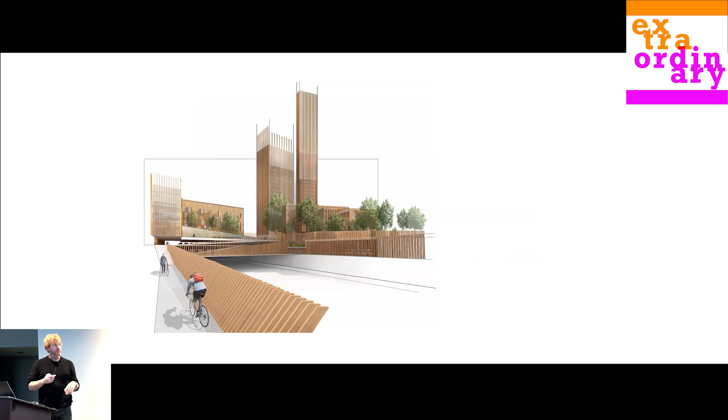And what that means is we have the ability to design totally new buildings in wood that we never thought we could do before. So these drawings are quite old now. About 20 years ago, I was starting to work on how we're going to build skyscrapers, which seemed crazy at the time. How could we build really big buildings? So this was a proposal for Paris in 2010 that was showing a 35-story wood building, which was a bit of an idea and a fantasy to show that it could happen.

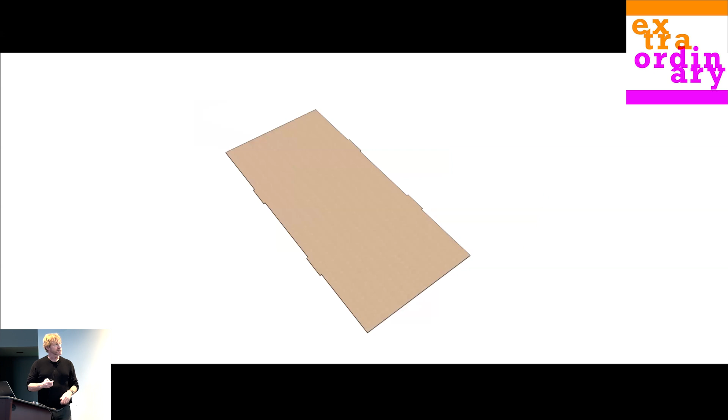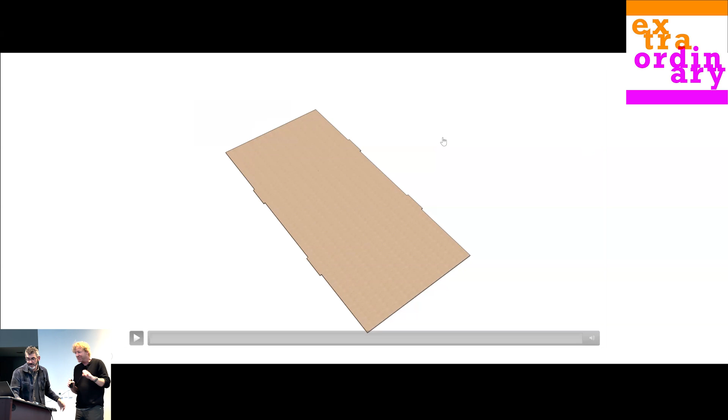But what over time we've been able to do is actually, sorry, I'm going to go back and just let this video go here, if it will. Or not. That's on me. I haven't set up the video properly. Oh yeah. Oh, look at you knowing how to do that. I'm still bad at this stuff. Let's see if this goes. Oh geez, I screwed that up. That was on me. I touched the screen. Get away. Be ubiquitous. All right, don't touch it.

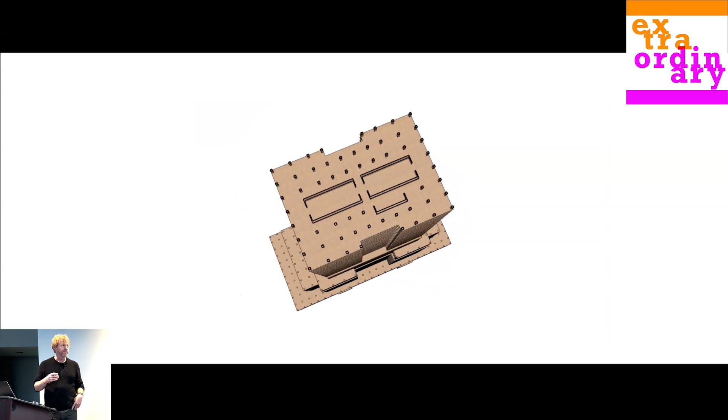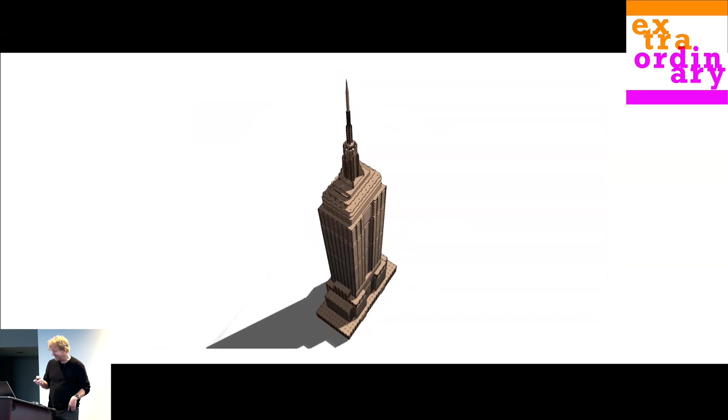Okay, so what we did was we started these exercises, and there's a long story that goes to how we ended up coming up with this idea, but we realized that this new material would allow us to build bigger buildings. And eventually, working with my team of engineers, we were able to actually show that you could have built this building entirely in timber, the Empire State Building, which is crazy to think about, but we fully engineered how you'd be able to do it. It's 102 stories tall, and we could build it in wood.

And it'd be safe. And of course, you're gonna have lots of questions. Will it burn? No, it won't. Will it fall down? No, it won't. The solutions are there. And I'm not gonna tell you all those stories today. Happy to talk afterwards about them. But we've been able to drive this idea from these conceptual ideas, conceptual engineering ideas, into reality.

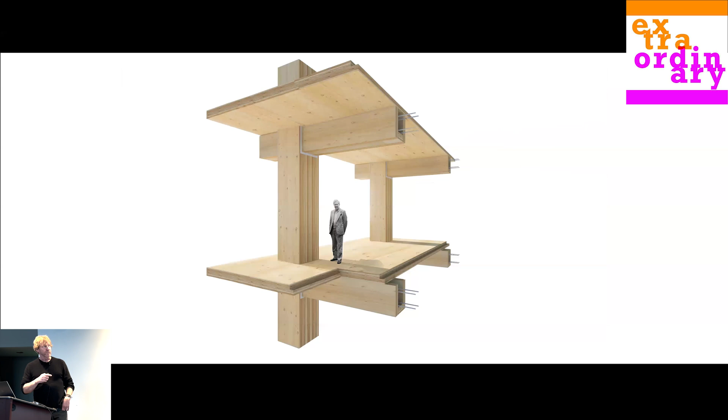And so I won't go into tons of details, but there are a million ways to do it. It's not one. There are also a whole family of products we can use now that exist. They're all together called mass timber. That one I showed you, cross-laminated timber, is one, but now there's a whole family of these huge panels that allow us to build big buildings.

So now think about 86% less and multiply it by 1 New York City every month for the next 40 years, and you see why this matters, right? If we can change our technology, we can make a difference. I'm going to show you in a few minutes a building not far from here where we were able to show that it was 96% less carbon than a building that was built by another architect just down the block, 96% less carbon, just by changing the technology of the way we build.

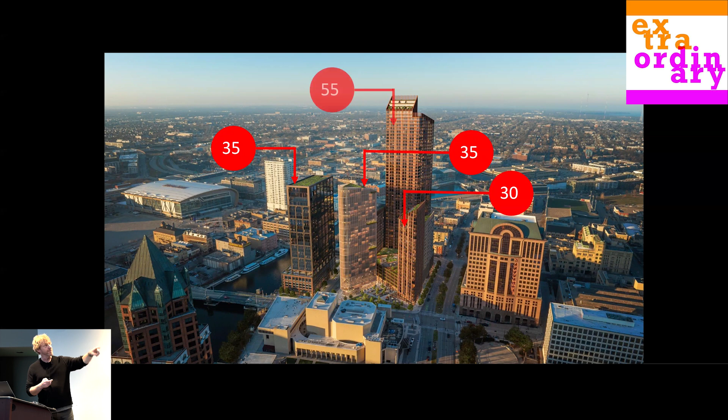So these are really early designs, and I'm going to be honest, I'm not super proud of them because they're not ready for prime time yet. That's not my design. It now will be, so I'm going to change it. It's a 35-story building, 35-story building, 30-story building. The middle one's a hotel. The one on the right's an office building. The left is a residential building. And in the back, that's the residential 55-story in the heart of Milwaukee.

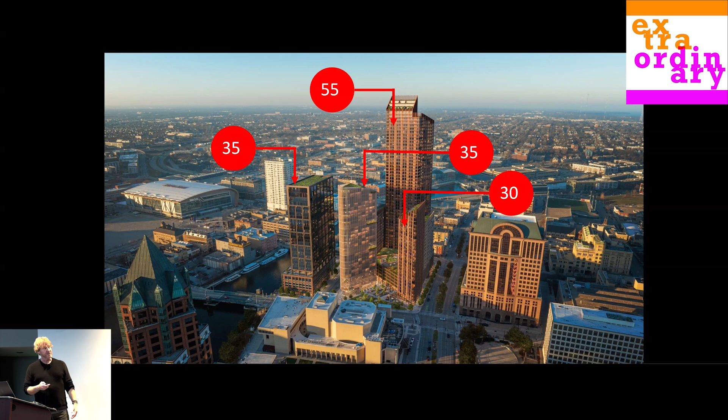And it's a cool site, but Milwaukee needs this. It needs revitalization, and they're bringing people back into the city. And so it's really interesting how much they've embraced it. And it's 1.3 million square feet of building. So it's a lot of wood.

So here's the answer to this question: why tall, right? So I've been running around talking about how we should build these tall wood buildings, and gave a TED talk, and that TED talk was translated into 30 languages all over the world. And it's pretty exciting, pretty cool, and it's new technology. And a ton of people said this would never happen, and now it's happening, not just with us, but architects all over the world are now doing this. But the reason why is kind of important to explain.

When the first skyscraper was built in the world, it was in Chicago, right? It was 10 stories tall, and it's because Otis had invented the Otis elevator. We had elevators before him, but he proved they were safe in the World's Fair. And because of that, Chicago became the beginning of tall buildings. And one of the things I love to think about is that if you were wealthy before the elevator, you lived on the ground floor. And then the moment the elevator came around, you lived on the top floor. So the cities changed, right? Where we could live because of that change.

But that first building at 10 stories, people were terrified to walk underneath the building. It was terrifying, 10 stories, which is kind of hilarious, right? There's a 10-story building here on campus, right? It's nothing to us to think about that scale today. And so what I realize is we need to show that we can build these super tall buildings, because what it does is it pushes the engineering, pushes the technology, pushes the building code, but it also says, if they can do this, this is totally fine.

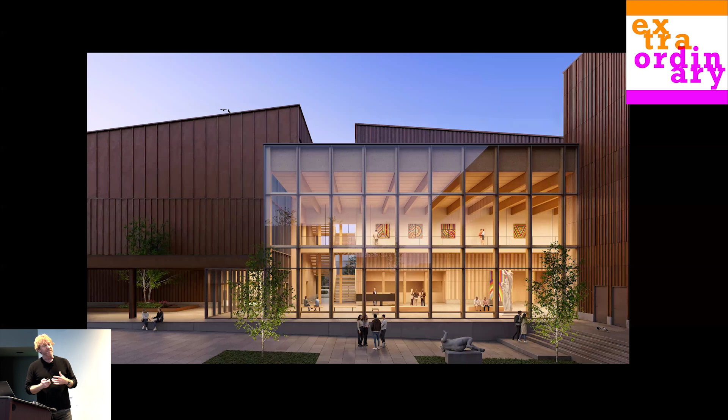And so instead, most of our work, and I'll take you through a bunch of other stuff, some built, some not built, most of our stuff's not big, but it's showing that almost any building type can be built with mass timber in this new way, and that it creates beautiful buildings that the public really love and that are really practical and affordable and deal with this climate crisis, or at least help, right? They're not sustainable. They're more sustainable than the alternative, and that's important to know.

There is no such thing as a sustainable building, except for the very, very rare exception where somebody digs a hole in the ground. Anything else is going to have an impact. All we can do is get a bit better and make buildings more sustainable. And that's the goal with this. And by the way, I'm not going to talk about it today, but if you want, watch my other TED Talk, I call it 5, it's about that 5th building material.

That's because this technology is cool. It's a big new change. It's being embraced. I just came from a conference with 4,000 architects in Portland last week. It's being embraced throughout North America and the world, but it's not a permanent solution. This is a bridge solution. We can't cut down our forests. We have to balance how we do this.

A lot of the world's forests are at risk because of forest fire, because of climate change. We have to keep innovating and adapting. And so this, to me, is a bridge technology, and it's an important one, but it has a lifespan. It's not going to be forever. And so I'm going to show buildings now that just give you a sense of how we're applying it to other types of buildings.

So let's jump to a build project around the corner. You guys can drive by this building. It's for, I think I can say this now, it's for Google. It's a new office building for them in mass timber, and it's their first ever mass timber building.

I'm allowed to talk about certain things with them. Are there any Googlers in the room? Don't get me in trouble. Not allowed to talk about other things.

So it's a sweet building, and this was a hugely pleasurable project to work on. Google were great to work with, super interested in innovation, allowed us to test a lot of things in their R&D lab. And it's a very unusual building. You get a sneak peek inside. The north side's really quiet.

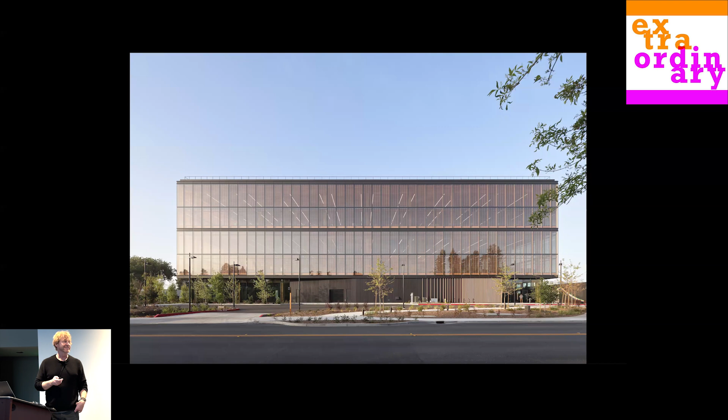It's like a box, which is fully glazed, but it has this really unusual curtain wall system that's called a closed cavity system. So it's this wide glass, 3 panes of glass, gap, 1 pane of glass. In that gap, there are wood louvers. You can see those wood louvers. Those open and close. They're about that wide, and they're made out of Accoya.

And they open and close based on the weather station, and we can control the daylight throughout the day because they have a requirement of no glare on your computer screen for the Google workers, and also for a certain amount of daylight, which is really important, right? Germany has a law that says every worker has to have daylight. Google figured out that's a good law, and they're doing that too, wherever they can.

So this envelope is really unusual and allowed us to do on the north side this really quiet building, and then on the south side, a building that has these cantilevers, and that's honestly because Google wanted it to be googly. It's not as quiet as I'm used to, but we made them happy, hopefully. And I think they are happy. This is a building that was 96% less carbon than another building nearby that was built at the same time. So we were really proud of that.

And the best line I heard was when Sergey came through the building, one of the 2 founders of Google. He learned there was 96% less carbon, and he said, "That's really cool. How do we get rid of the last 4%?" And I'm like, that's why you're the founder of Google. That's exactly the right kind of question to ask. It's hard. The last 4% is really hard to get rid of because glass and aluminum have a big footprint. Aluminum's really high footprint.

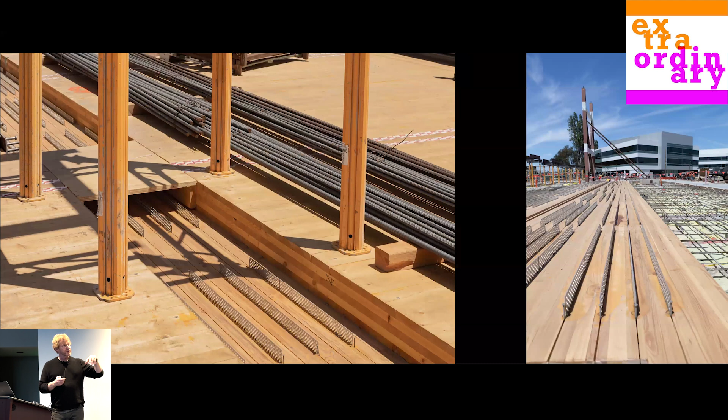There are also areas that are really unusual. And what's cool about these wood technologies is every time we do it, it's a little bit different. In this case, see these little fins in that gap, it's called the HBV system. Those are fins of metal with little holes in them. And in this case, it's a hybrid system. So we actually pour a thin layer of concrete across the top of it, and it bonds through those little holes. It's kind of like rebar, but it actually bonds to the wood. So you get a wood concrete hybrid structure.

And why that's really cool is, in a floor like this, the top is in compression, meaning the top is pushing together, and the bottom of the slab is in tension, meaning it's pulling apart. So in our case, the wood's on the bottom, pulling apart. You see it in the ceiling, so it's aesthetically really nice. And the concrete, which is really good in compression and terrible in tension, is in compression. So you're combining the best qualities of the two materials. We have to do this sometimes to do bigger spans, or for a university laboratory building, to reduce vibration, for instance.

So the ability to mix materials still exists in how we're working, but these are all new. And this is the first time this has been done in America. We'd already done it a few times in Canada, so we knew how it worked really well. But each time, these are like innovations that will, I hope, inform and transform the industry.

So there you see the integration of the steel. Now that steel is all painted with an intumescent paint, so it has a fire paint on it. And it's not very thick. It would be a lot thicker if it was carrying the weight of the building, but it's only carrying the lateral, so it didn't need to be as thick. And then you can see sprinklers and things hang out there, or you've got to figure out how to integrate them.

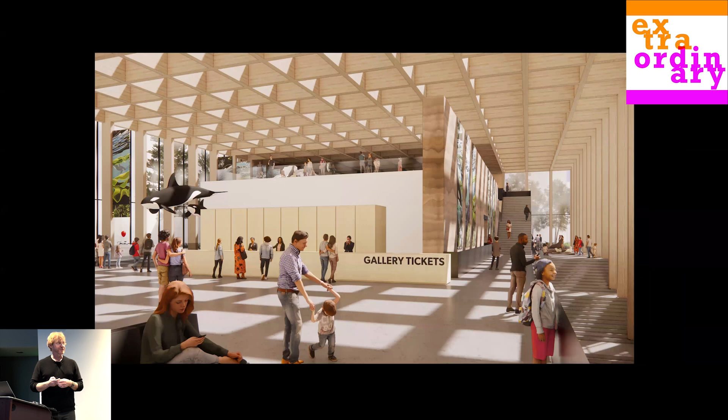Okay, randomly, I don't know why this is next because I kind of just shuffled the deck a bit, but this is a new museum we're working on in British Columbia, the Royal BC Museum, all mass timber. What's really fun about this is when I walk to work, I'll walk right past this building, which is really fun if we get it built.

But as I said, students learn faster and people work more quickly. When we started working with one of the local tech companies, one of the first things they said to me was no straight corridors. And I was like, wow, what does that mean? Like, what do you mean by no straight corridors? And it was just so interesting how well they knew their team.

And they said, like, we have a lot of people that have social anxiety, and a straight corridor means you see somebody way in the distance, and now you're walking towards them, and that anticipation can cause a lot of stress for people. And I was like, that's really cool that you know your team, and that makes sense. I get that.

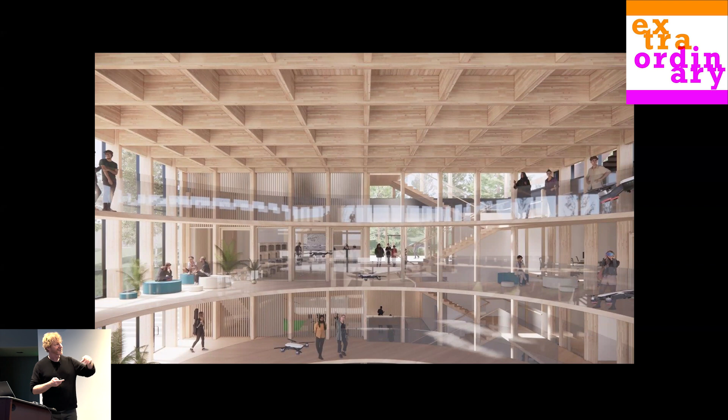And it's hard to do, but it's important. So this project was able to do a lot of that. This is a really weird innovation center where they basically, it's a robotics center. So the students do drone battles in this space, which I'd never heard of. See the drones in there? We literally designed a drone battle room because it's so important to the school. They clearly have too much money, but it was kind of interesting.

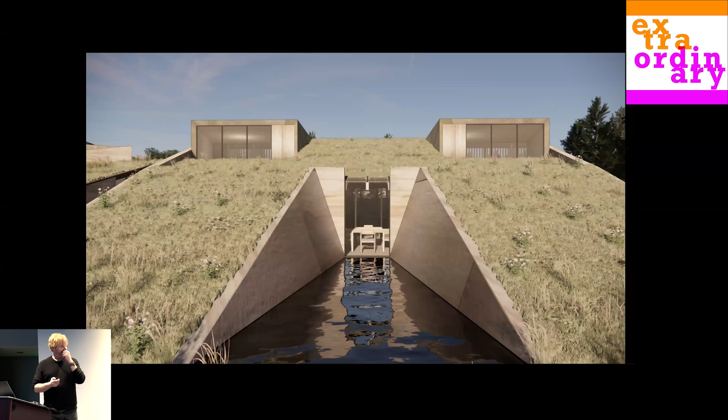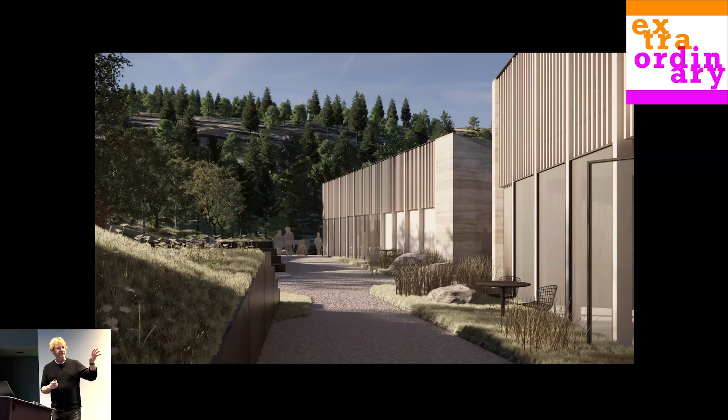This is a hotel we're doing on a small island. It's very early drawings, but I was telling Zach about this earlier. This is on a site on an island called Salt Spring Island. I live here, and Salt Spring Island is, if you know the San Juan Islands in Washington State, some of you know them, they become what we call in Canada the Gulf Islands. Same islands, just different name. So I can see the US ones from here.

And this site is a 4,000 or 5,000-year-old First Nation site, indigenous site. And it's at the end of a bay, and where we work, and I'll show you in a minute, we work a lot with indigenous communities. We have 12 active projects with different nations throughout British Columbia right now, schools and health centers and community centers.

But in this case, we basically are working to sort of say, if you just landed here and had nothing, and you had to build a shelter, how would you do it? Well, Zach and I were talking about this, you watch these TV shows and you build a little lean-to and then you cover it with boughs from the forest. And so we're building this hotel basically with the same technology you would use 1,000 years ago, 2,000 years ago, and building on this site.

And these images don't really do a good job showing it, but I'm really excited. Next time I come, if you want to come visit, come stay here, because it's going to be sweet. This thing's one of my favorite projects.

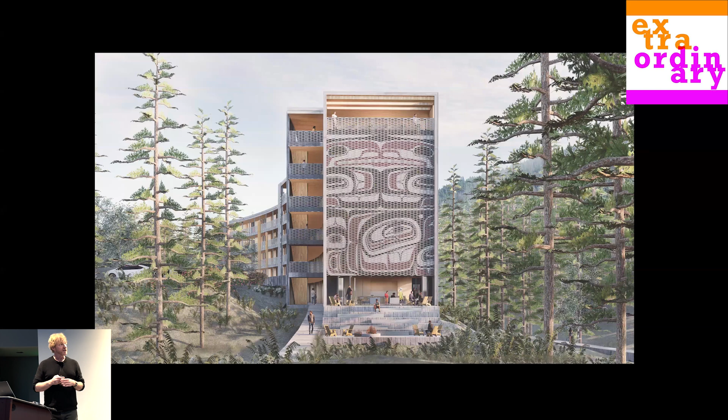As I said, we do a lot with Indigenous communities. This happens to be housing for the Lax Kw'alaams Nation, which is way up near Alaska. Through that, we've become really connected with the Indigenous arts community, which is super fascinating. And we've been able to incorporate a lot of Indigenous work into our buildings.

I learned from working for Cesar a kind of cool thing, which is that so many times there's an art program where an architect will build a building, and after it's done, they'll put art on the wall. And that's fine. Art programs are really important. It's important to invest in art. But if you think about an older building, and some of the buildings we see here on the campus, there is this old tradition where artists and craftspeople were engaged at the beginning of the process. And the architect, the craftsperson, the builder and the artist all work together to integrate the art into the architecture, not just add it later.

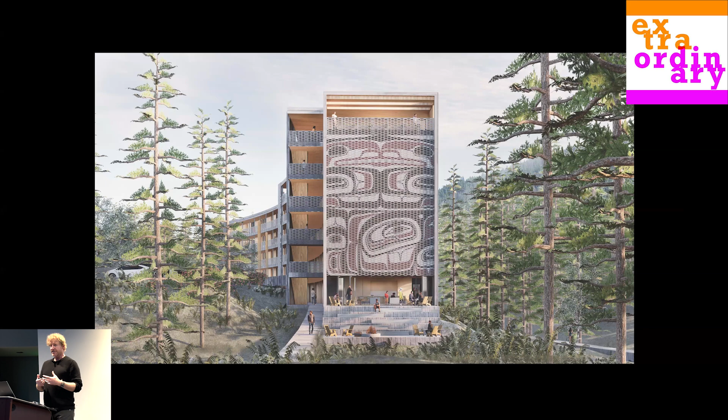And so when I worked for Cesar, we did Washington, D.C.'s airport, and we did that. We created this big program of art. And if you ever go to Reagan National Airport, you'll see it everywhere, where the handrails and the floor patterns are all by artists instead of the architect. And it was a really cool experience.

So what's my time? Make sure you give me a hook here. Perfect.

Okay, so mass timber, I said, it's got all these different applications, right? And one of the coolest things about it is that it means I can prefabricate. I can build in a factory, highly accurate, cutting it on CNC machines. Every hole for every pipe is all done in the factory. It's really easy to build. Like I said, it's really quiet. It takes a very small team. When we build these huge buildings, you see literally 4 guys on site. 4 guys. It's crazy, and they're really good, and they really love it, and we work to train them.

But it's really interesting. New York, the Carpenters Association, totally against it. Ontario, the Carpenters Association built an entire building to teach carpenters how to do this. So it's really interesting, the different cultures there too.

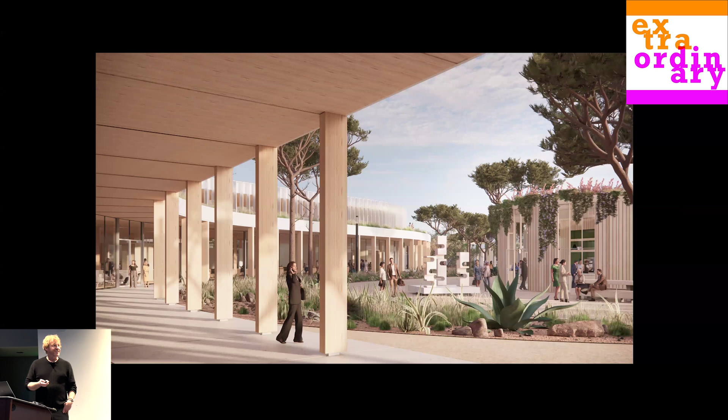And I think for me, that resonates versus this, which is quite complicated. So it's not that we only do those things. This is a campus in California. I'm going to slide through a couple slides quickly.

And I'm writing a book, which I don't have time to tell you about, but is the story of Western failure to understand sustainability, and it all comes from a lesson here. So maybe if you spot me and you want to hear that story later, I'll try to tell you because I'm super stoked about it.

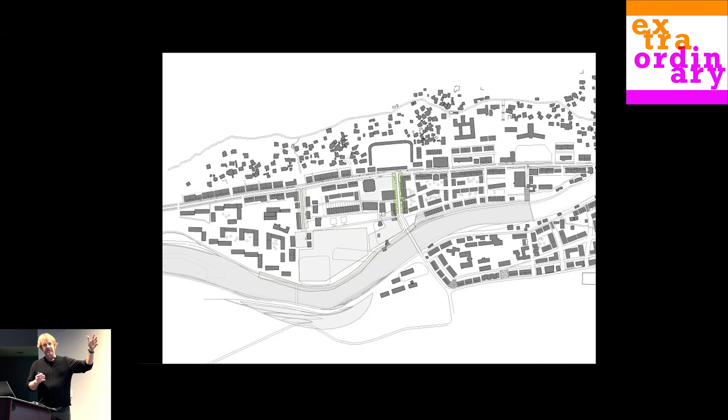And when I look across the 50-meter wide, 150-foot wide river to Afghanistan, you could talk to people, although you don't. They're lovely, it's just there's no conversation. And they are living in this way that you lived 1,000 years ago. They built their homes in the worst piece of land to protect every square inch of agricultural land. They put them side by side to save heat, just like you would cuddle together.

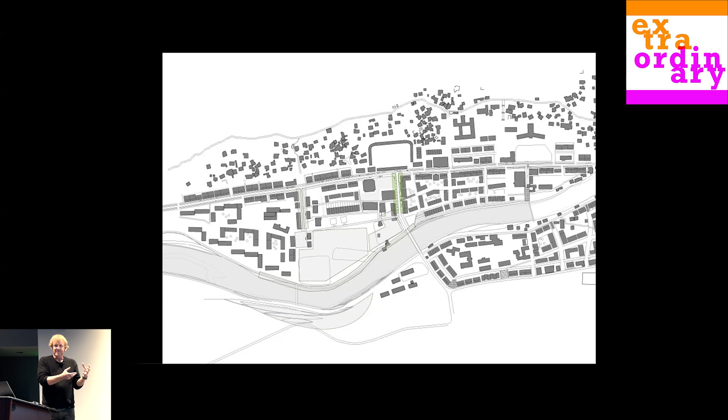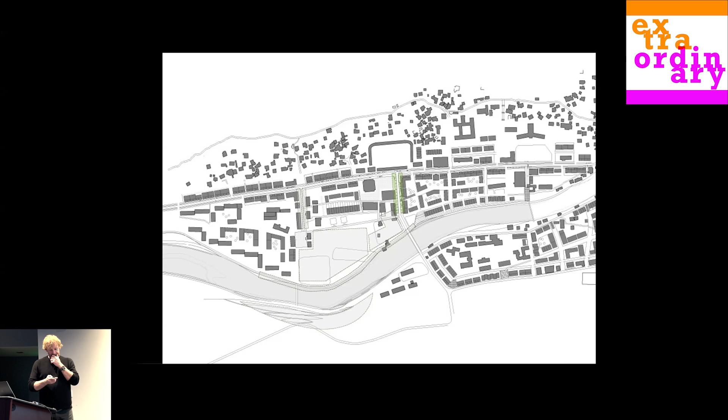And it was this big eye opener that what we've done is actually created this deep investment in oil and losing our sense of understanding where our food comes from. And they're living in this ancient way. And the answer has to be somewhere between the two. And so that's the book that's coming out called Parallel Paths.

And I think what I feel is that, I used to always say this, I think I said it on my first TED Talk, is that I've never seen somebody walk into my building and hug a concrete column, but it happens all the time when you build a wood building. And I do it all the time. I'm always like, yeah, it feels good.

But as an architect, I think that we often over design things. We spend a lot of energy making things extra nice. And sometimes you just go back to, just look at the wood, just let the wood do the work. It's so beautiful. Just make beautiful joinery, be really quiet. And the wood does the work.

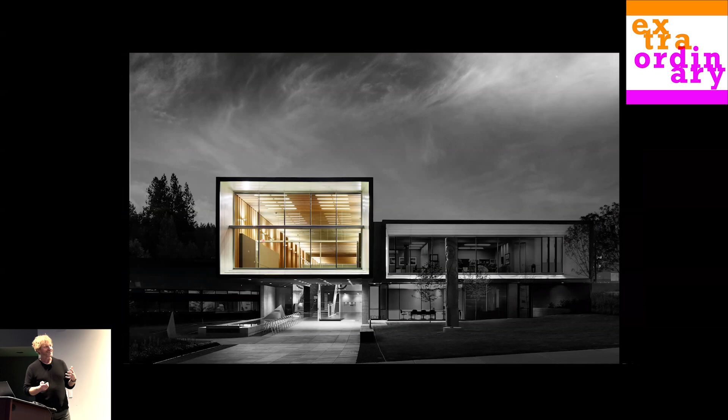We all feel connected to natural materials, everybody. And so I've never had anybody come into a building and go, oh, I hate the wood. That doesn't happen typically, right? This is a city hall, totally different mass timber story that I don't have time for.

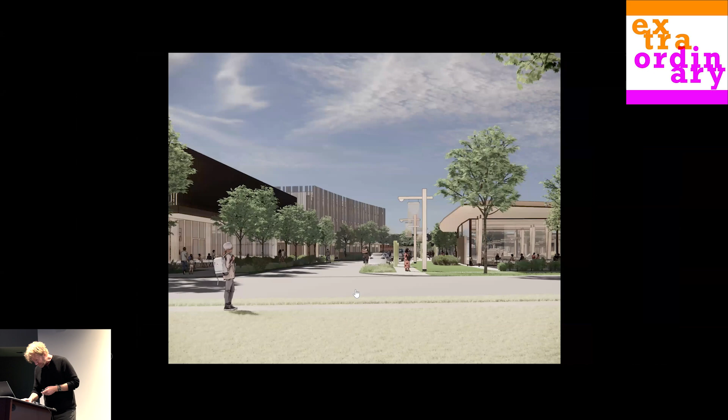But again, you're getting a sense, hopefully, of the diversity of types of projects that can be built in these materials. Okay, I did this because I made that point earlier. I always wanted to design a strip mall, which is something you never hear an architect say, or sometimes you do, but not enough architects. And I did because where 95% of people live their lives is going to strip malls to buy their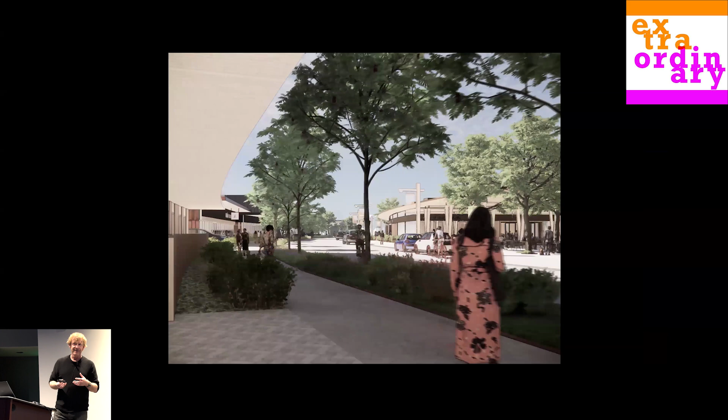groceries or whatever. And so we got approached actually by a forestry company on Vancouver Island. They said, we want to build some retail buildings and we want to build this grocery store and we've got a big pile of wood. What can we do? And so we're working on this and I cannot wait to have an all timber grocery store, which in North America would be special, but in Europe actually is not.

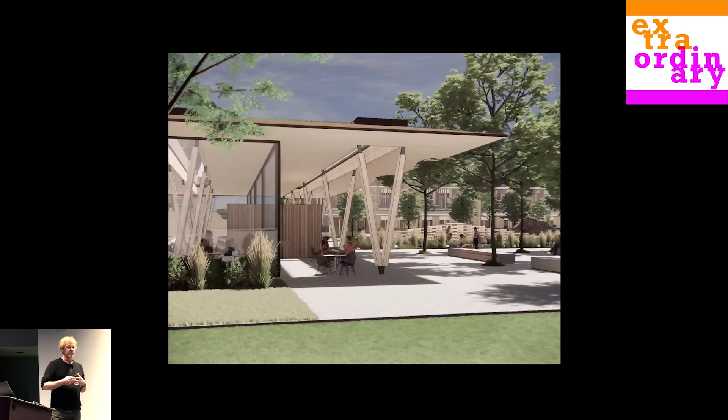Tesco, if you know who they are, have decided that they're only going to build in mass timber. Walmart just built all of their big offices in mass timber in Arkansas. There's a huge shift now where every major company in the world is starting to recognize that they have a civic duty and a belief of their own to build for climate, and there's this shift towards mass timber.

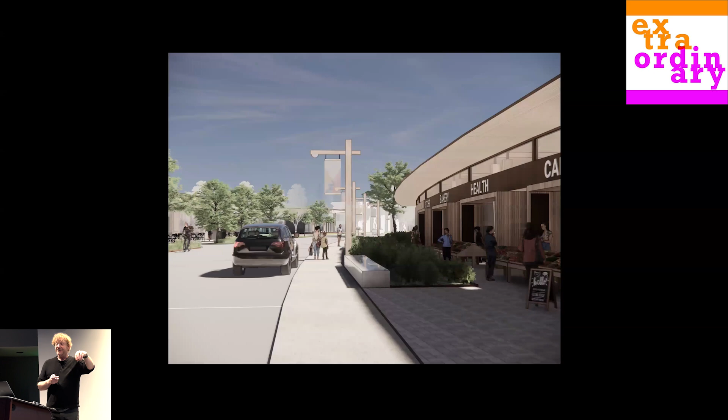This is in a fairly small northern community. It'll probably never have landscape quite as nice as that, given the climate, but it's a really sweet little grocery store, right? And there's an amazing chain of grocery stores in Austria that always inspired me, where each little town you drive into, it's the same chain, but in each case, they have a different architect and it's all wood. And each one is literally like the modern town church.

You go into small towns and the church is the center. And the architecture of these little grocery stores, where, let's face it, that's where people gather, has turned into that. And I think that is a really exciting idea to start seeing here in North America. So there you go, that's that. All right, last couple slides. This is in Paris. I apologize that I can't spend time on each of these.

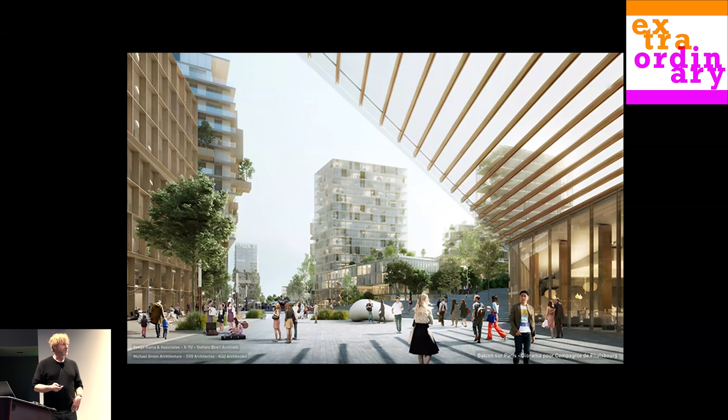All the characters of the book are throughout the house. It's a really special house and it kind of works. And I could do a whole talk just about this house. But what's also really interesting and really sad at the same time is that this serves 73 families, and the need for kids from rural communities to come to the main children's hospital in Vancouver is so large that we're now doubling the size of this building, another 75 families.

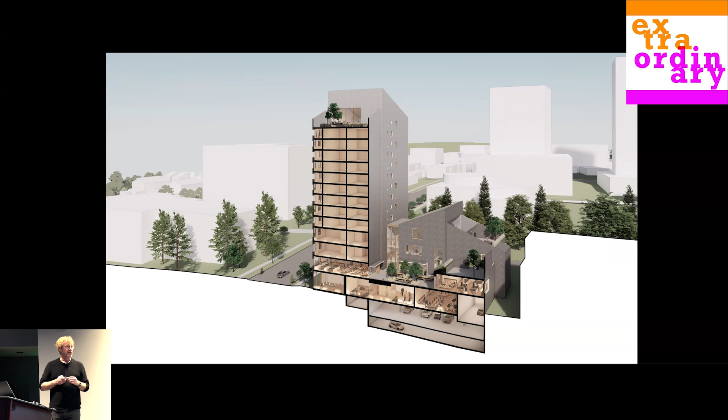But this is what I was going to jump to, and I think this is the last project just to touch on here. This is one that we're working on right now, just off the site of the Children's Hospital, near the other house. And this is for longer term stays. They don't have a big lot, so we're building a tower. The architectural feel is somehow in the same family. But our code is like your code now for earthquakes. And this is a 14-story mass timber building.

It's gotten a little harder with our brand new code edition. It's hard to do in all wood. And so we're doing this as an all wood project, meaning there's none of those steel braces in it, not a concrete core for the elevator. It's all wood with this really cool system that repairs itself in an earthquake, which is hard to explain, but I'll try to.

And I'm excited about it because the most important thing is the families it serves. But the technology in this will teach, I think, a whole generation how we can build here in California buildings this size, if not bigger, entirely in wood, which is really effective.

Why this matters, and I'll end here, to build it in wood and in this kind of way. There's other variations; I don't want to say this is the only way. These buildings are built on what's called a rocking shear wall. So the panels basically allow the building in an earthquake to move, and there's little tiny, what are called fusible links. They're not tiny, they're actually like this big, but there's steel links between two panels, if you can imagine.

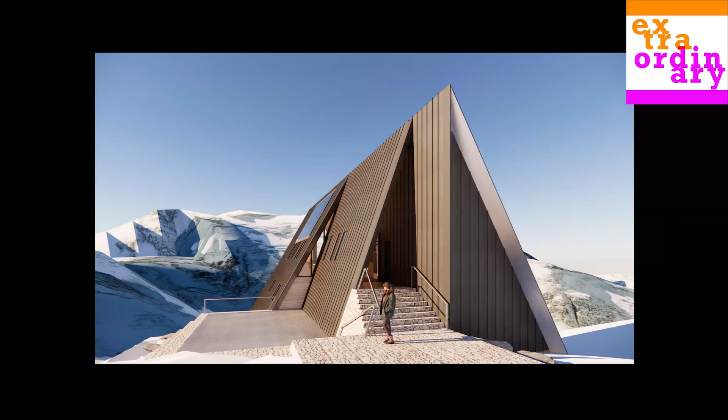Okay, it's done. Now what? No, don't take it off. You have to sit and answer questions. Oh, I do. Okay. Thank you for all of your patience with me. I am Canadian. Where's my water? Yes, hi. Good, thank you, that was great. We're gonna just ask a couple questions. Give you your water first. No, it's okay, I have a can somewhere. Are you okay? Yeah, I'm all right. Maybe a little water bottle. It's not important.

So earlier today, we were talking about how for most of this century, architects have really focused on a specific aesthetic style to achieve success and have their brand. And you're really much more focused on being the wood guy, for lack of a better word, and achieving mastery of that specific material. You hardly talked at all about the finished work and what it looks like. That's kind of irrelevant. It's more about the process: what can the wood do for me? How do I get there? So this is going to sound terrible as an answer to that question. How things look is the easy part.

And it should be seen as the easy part. Making pretty things, I don't think that's that hard. I mean, everybody has a different opinion on what's pretty, but it's not that hard. Giving things meaning is hard. That's the difference, the shift I think architecture has to make, is what does meaning mean, right?

It's a meaning to the user. How does it transform their lives? Meaning to the climate, how is a building actually creating meaning? And, you know, I believe all these things are stepping stones, right? They're all learning processes that then you share. And if that's growth, that's what we do, right? So our role in a way is using the buildings as a kind of teaching tool, right?